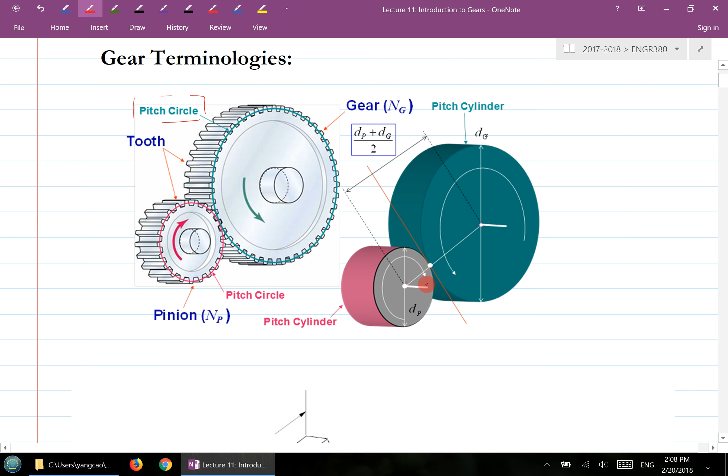Now coming back to this bigger one here. So you have a handout, and I think last lecture I gave you one of these. If you don't have one, this has a little more space to write. If you want one, you can come here and pick one up. Otherwise, there are also handouts in today's handout there.

So what are the important parameters here? There are 3 important circles - actually 4 or 5, but here it's 4. The circle at the outermost, here, is called the addendum circle.

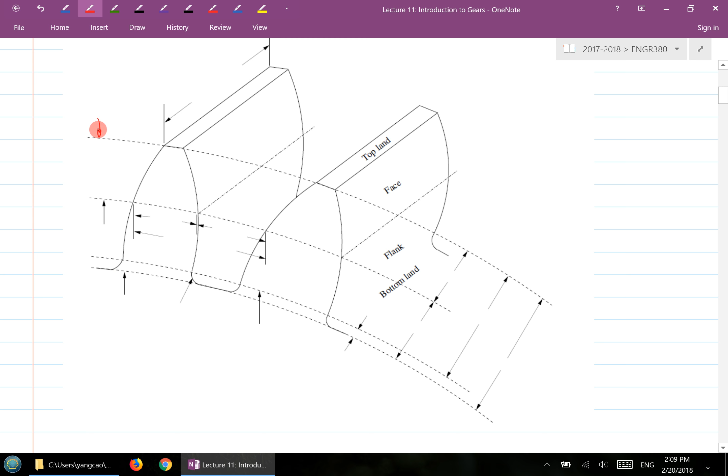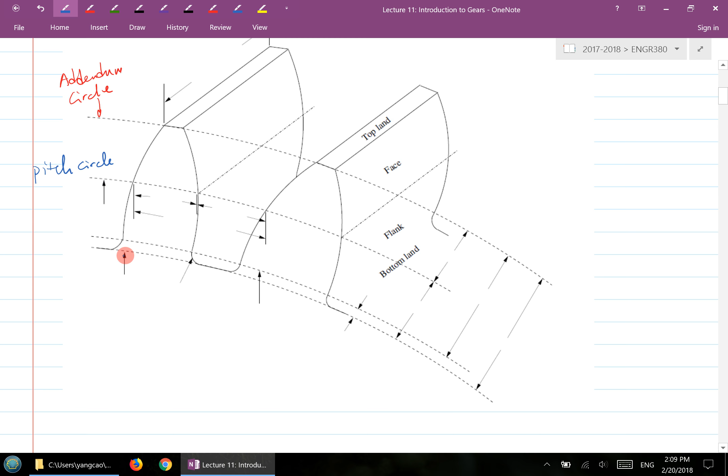So I want you to get used to all of this terminology here. The middle circle here is called the pitch circle. And then the circle at the bottom here is called the dedendum circle.

So these 3 circles are the most important circles. There's another circle called the base circle, which we will illustrate in the next diagram. And there's another circle here, called the clearance circle.

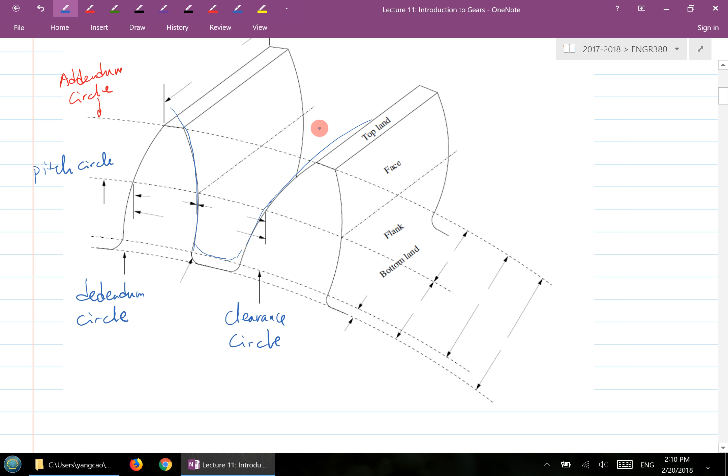Clearance circle is basically a circle that is tangent to the addendum circle of the mating gear. So let's say if you have another gear on the other end here, like this. This is the addendum circle for the other gear, and that addendum circle will be tangent to this clearance circle here, giving you clearance between the dedendum of this circle and the addendum of the other gear. So that's the clearance circle.

Along the pitch circle, from one end of the tooth to the other end of the tooth, this portion is called the tooth thickness. From one point on this tooth to the adjacent point on the adjacent tooth, this is called the width of space. If you add the tooth thickness and the width of space together, you get the distance from this end to here along the pitch circle. That gives you the so-called circular pitch.

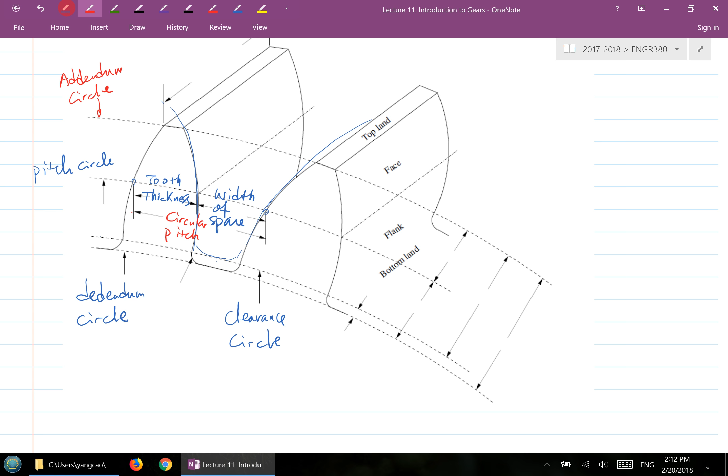And of course, there's another one here. If you measure the thickness of this gear, this is called face width. We typically use F to represent the face width. This is sometimes a little misleading, because sometimes we see F as a force, but in this section, F is the symbol used for face width. In some literature, they use a small b for face width.

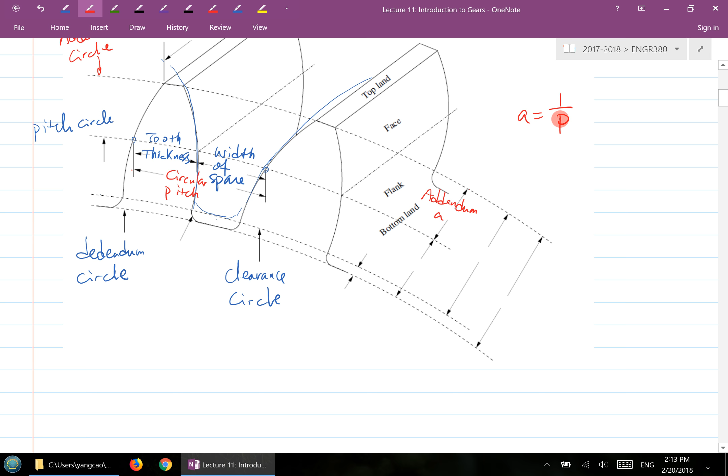Then over here, there are a number of parameters that are important. If you look at the shorter distance between the addendum circle and the pitch circle here, this is called the addendum. We use small a to represent this addendum. Typically for full-depth teeth, this a equals 1 over capital P, and I'll explain what capital P is.

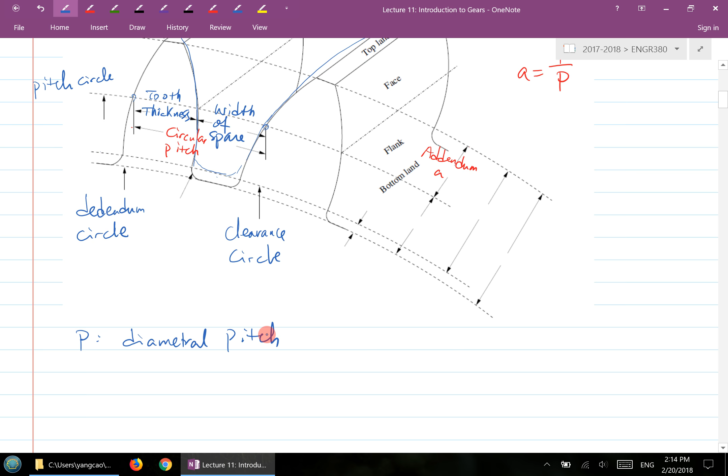Capital P here is called diametral pitch. So what is diametral pitch basically? Diametral pitch is defined as P equal to N divided by D, where N is the number of teeth and D is the diameter of the pitch circle. Sometimes we call it pitch diameter. You can see the unit for the diametral pitch is basically the number of teeth per inch.

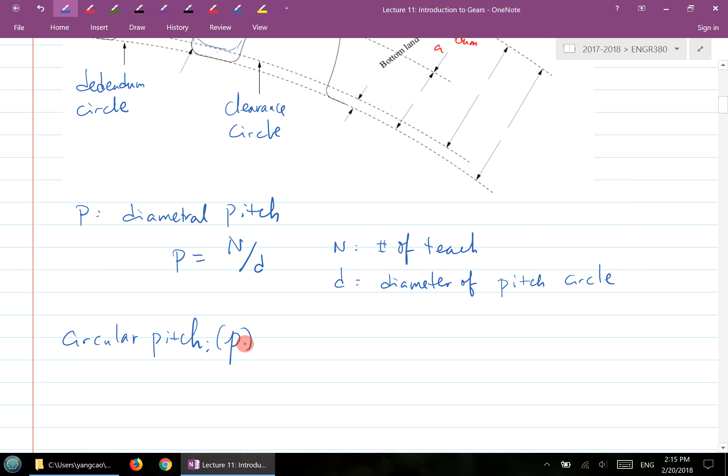Now coming back to diametral pitch, let's look at the concept of circular pitch again. For circular pitch, we use small p to represent it. The circular pitch is the distance from here to here. If you put it into mathematics, the circular pitch is pi d over n, where n is the number of teeth, and if you look at the perimeter of the circle divided by that, you get this circular pitch.

There's a relationship between diametral pitch and circular pitch. With one simple manipulation, you'll see capital P times small p equals pi. That's the connection between diametral pitch and circular pitch. Diametral pitch is a very important parameter - if you want a pair of gears to drive or mate with each other, the diametral pitch has to be identical for these two gears.

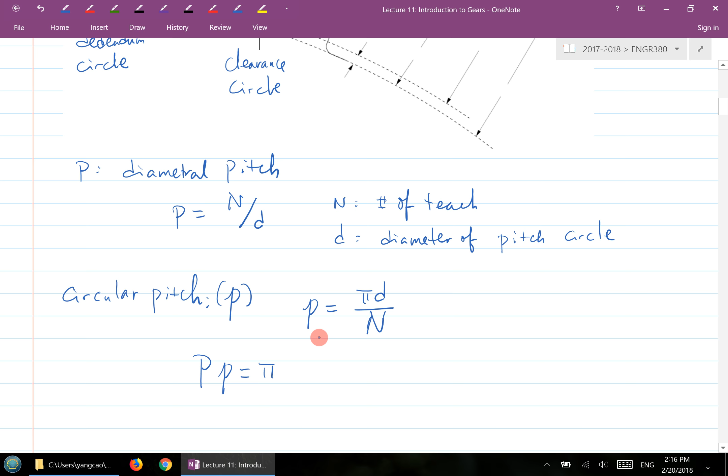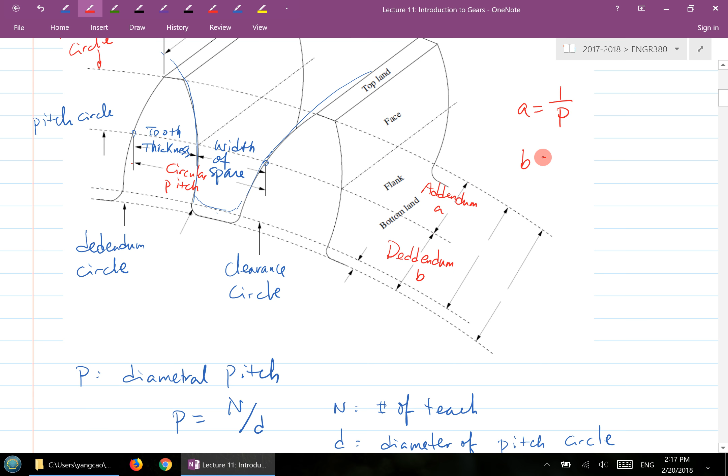Coming back to this addendum - the addendum is related to the diametral pitch, which is 1 over capital P. And if you look further, at the distance between the pitch circle and the dedendum circle, this is called the dedendum, and we use B for the dedendum. Typically for full-size teeth, it's 1.25 over capital P, the dedendum.

So if you look at further here, there's also a distance between the addendum circle and the clearance circle. So this part we call the working depth.

Okay, we call it working depth. And there's also a distance between the addendum circle and the dedendum circle here, so this is called the whole depth.

So let's call it H. And there's a distance between the clearance circle and the dedendum circle, you call that clearance. Let's call it C. The C value here is typically 0.25 over capital P, so that's your clearance value.

So as you can see, your whole depth, H, is equal to A plus B. And then the working depth, you can use this relationship: working depth is A plus B, minus C. Okay, so that's from this figure.

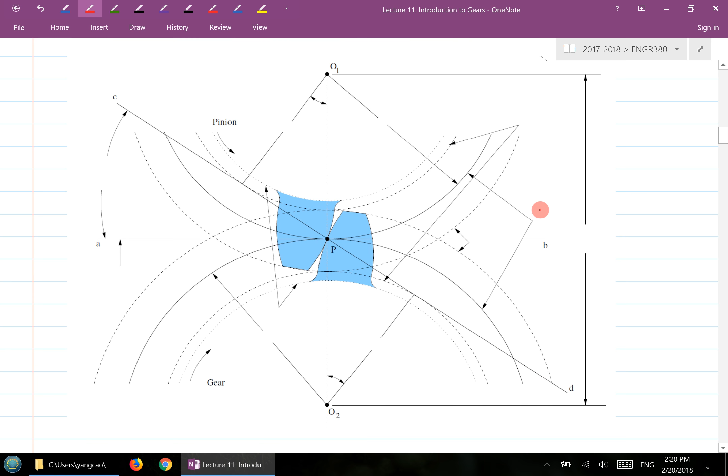There's one circle that's not on the previous slides, which is this one here, the most inner circle, and also this circle here. There are two circles that are not on the previous slide.

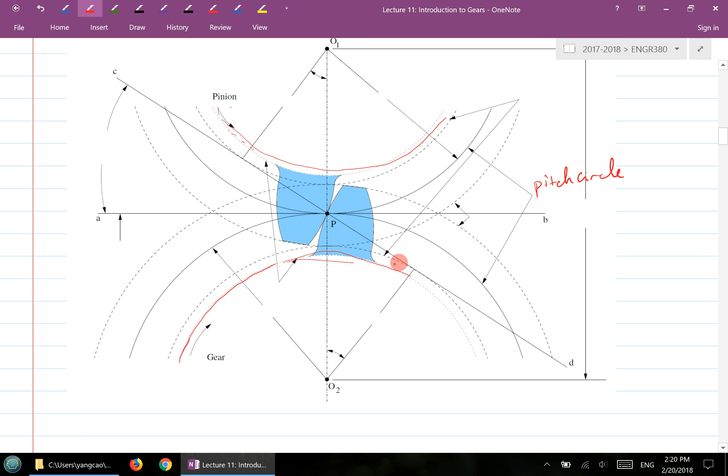Which arrow does that point to again? These two arrows, right? These two arrows point to those two circles. So this is the so-called base circle.

What is a base circle? We'll actually look at it a little bit shortly. The base circle is a circle based on which the profile of the gear starts to generate. You see the gear profile, which is a certain type of curve, and that curve is generated based on this base circle. That profile we call the involute profile, which I'll cover shortly. But that's basically what base circle means.

What's the difference between base circle and the dedendum? Oh sorry, my eyesight, this is not a base circle, what am I talking about here. This is dedendum circle, right? This one here, the bottom, is dedendum circle. Base circle is this one.

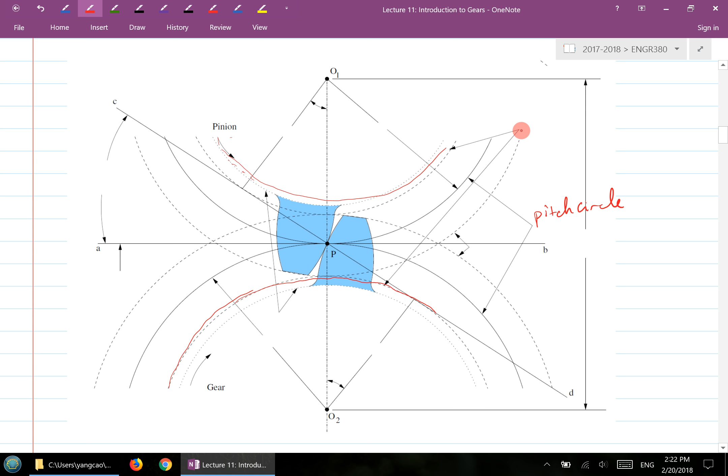Base circle is this circle here, the one that's above the dedendum circle. Which arrow is that? This arrow here, right? Yeah, so this is the base circle. Otherwise there wouldn't be any difference, right? Yeah, the one I just wrote down here is dedendum circle.

So this is the base circle here. There's a portion of gear tooth profile generated from this point, which is the involute, and I'll teach that shortly. There's a little portion of the tooth profile between the base circle and the dedendum circle, and that portion is actually a straight line. Then you chamfer that and fillet it, you see a little bit to fill it here. So this base circle is not on the previous one.

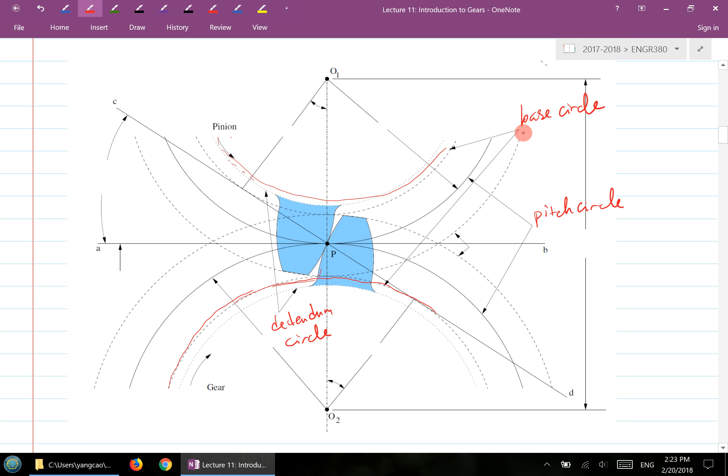Now there's a difference, you might confuse the base circle with the clearance circle though. Remember, the clearance circle is the circle that is tangent to the addendum of the mating gear, right? So if you look at the clearance circle, this is the clearance circle.

If you have a gear or pinion on the other end, then there is an addendum circle here, so that clearance circle is tangent to the addendum circle. And the base circle is a circle upon which the gear profile is generated. Good? Yeah.

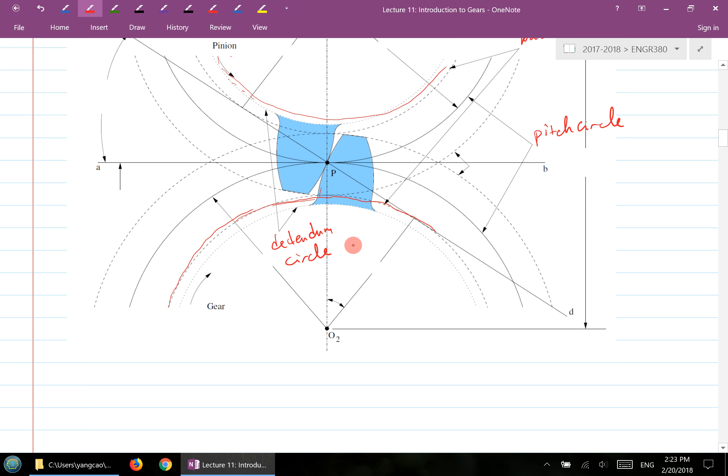So of course you have an addendum, which is this portion here, so that's your addendum circle. Okay, so that covers all of this here, right? Yes. So it's just coincidence that our base circle is at the same point, the same place that our dedendum circle would be?

This one, yeah, I don't think it's a coincidence. Yes, it's sort of tangent to the addendum circle, right? Addendum circle. But yes, it doesn't have to be.

So base circle, I'll show you a little bit of animation later just to show you some of that shortly, okay. And then there is a horizontal line here that is basically tangent to both of the two pitch circles. We call that the AB line here, so this is called the common tangent line.

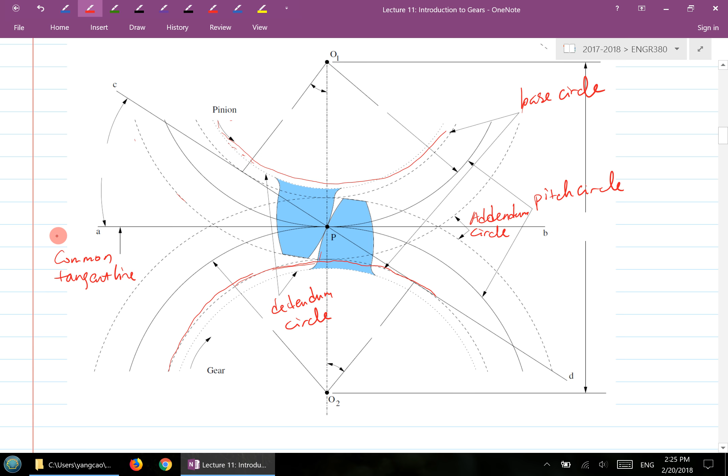Okay, common tangent line. Above the common tangent line here, there is another angle between the common tangent line and the line CD. This is CD at here. So the CD at here, if you look at it, right?

The CD line, it's a line that is tangent to which two circles? To this circle and this circle, which we just said are base circles, right? So the CD line is tangent to both of the base circles, and this CD line is called the line of action.

Okay, so line of action. Basically, this CD line is perpendicular. If you look at this CD line, it's perpendicular to both of these tooth profiles that are in contact at here, because you're using one tooth to push the other, right? So the action-reaction force, because of this pushing, is along this line of action at here.

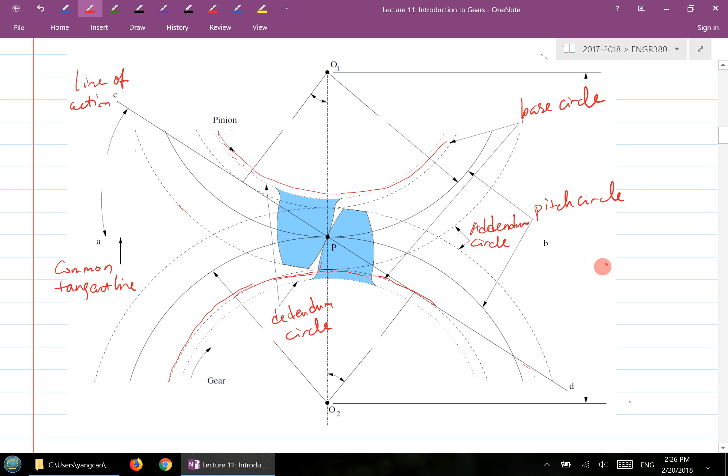That's what the line of action is. And the line of action intersects with O1, O2, and this point at here is called the pitch point. So this capital P here is called the pitch point. So as I'm going to cover very shortly, for the gear, there's only one line of action, which is this one. And that type of structure guarantees that you're going to have a constant angular velocity ratio, because of this kind of tooth profile and structure of the curve.

The angle between the line of action and a common line here, we call that phi. So this is called the pressure angle. Pressure angle essentially is how the force is being pressed from one tooth to the other tooth. So the pressure angle is a very important angle. In gearing, normally 20-25 degrees. We use 20 degrees quite a lot.

There are also sometimes 14.5 degrees. You can literally use any angle for the pressure angle, but these are the three pressure angles that the industry has been using for the gears that you buy, essentially. You specify pressure angle by specifying one of these values.

So if you visualize this, you have two drums, and then the line of action is like a string that is tangent to the two drums or cylinders at here. So that tangent is very tightly tangent here. So these two basically will be moving, constrained by this line from here to here. This line, they're not going to relax. They'll always be like a very tightly stretched string between these two cylinders. So that's pressure angle.

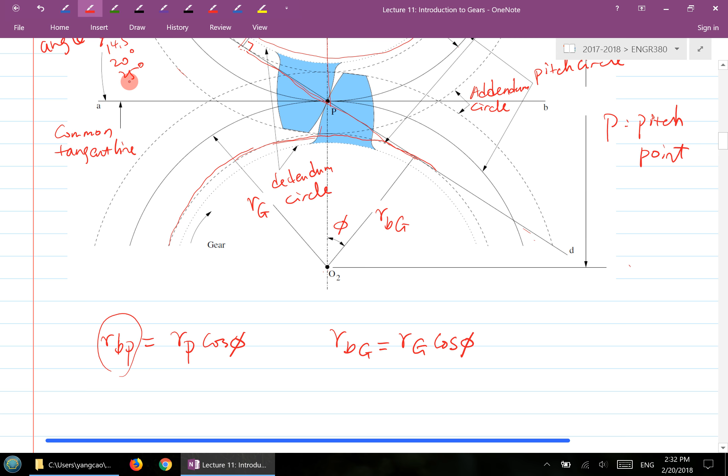Later I'll show you the picture of what's the effect of that in terms of the generation of the involute profile. So those are the terminologies essentially that you probably will come across quite often in the assignments or in the near future for gear designs.

Another thing we want to touch upon is the gear tooth profile. Before we talk about the gear tooth profile, let's talk a little bit about the very general case. Suppose you use one object pushing another object, and both of the objects are fixed at a certain pivotal point.

Now, if your objective is to generate a constant angular velocity ratio, okay, if the objective is to maintain a constant angular velocity ratio, that's very common, right? You probably learned this in kinematics and machine mechanisms, the 381 course.

There's a very interesting mechanical component called the cam. The surface of the cam maintains a kind of surface which gives you the objective of maintaining a constant angular velocity ratio. If you can achieve this objective using this sort of surface, this gives you the so-called conjugate action.

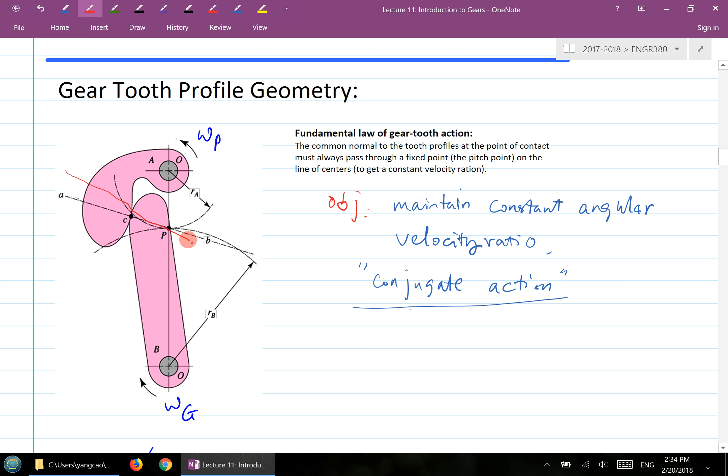However, the difference is, if you move it to the next location, you might have a different line of action. You might have a line of action that's this, but the line of action will still go through this pitch point P. So basically this way you will be able to maintain this constant angular velocity ratio.

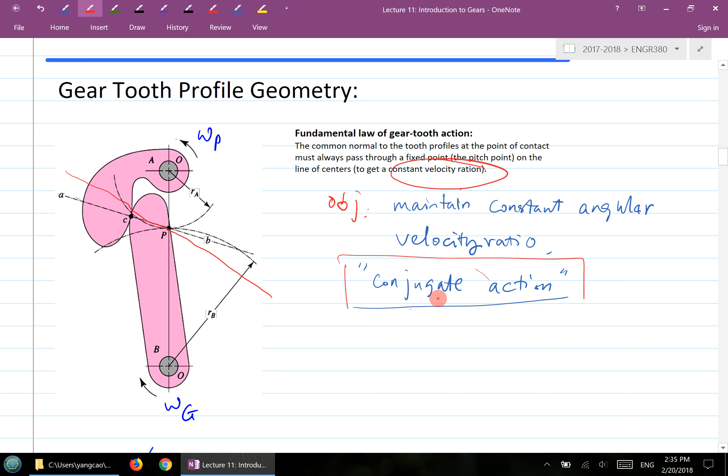That type of profile is something that when you design a gear, that's basically what you want. You want to maintain a constant angular velocity ratio, so you want to have a conjugate action. So what type of surface profile will give you this objective? This is basically the profile for the gear. The profile of the gear is the so-called involute profile.

So what is the involute then, the involute profile for gear? Imagine this: you have a cylinder, and you have a string wrapped around this cylinder very tightly. Now what you start to do is unwrap this string from the cylinder. You grab one end of the string, so this is one end of the string here.

When you unwrap this string from the cylinder, make sure the string is stretched tightly every moment, and you basically unwrap that string from the cylinder. Now if you trace out the trajectory of the string, which is this one here, it gives you this so-called involute curve. The gear profile is basically part of the involute curve from here to here.

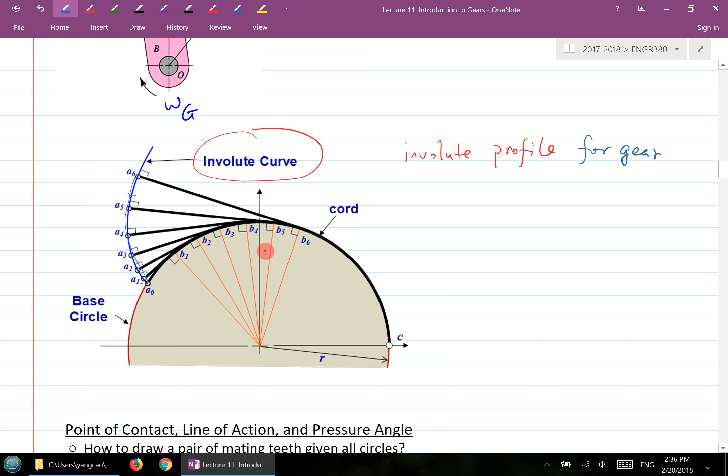And this circle is the circle I just mentioned, that's the base circle. So the gear profile, this portion here, is this involute profile, and it's generated in a manner like this. That's what the involute profile is.

You can mathematically model this involute profile using a parametric equation. You can take a look at my lecture notes, which provide a more detailed derivation of the mathematical expression for the involute profile.

Suppose I'm going to generate the parametric equation for the involute profile starting from this A location. The red line shows the trajectory, like a piece of wire or string unwrapping or unwinding from this cylinder here.

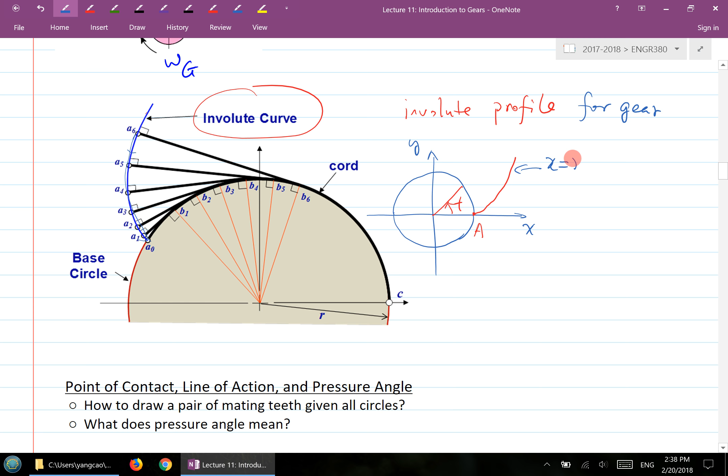If you look at the lecture notes and derive the parametric equation, you'll see that for this involute curve, x equals r times cosine t plus rt sine t, and y equals r times sine t minus rt cosine t. So you get a parametric equation describing this involute profile.

In this week's tutorial, I sent you an email with an exercise to use SolidWorks to generate the gear. By going through the exercise, you get familiar with all the different terminologies, and one of the approaches is to generate this gear profile using a parametric equation.

You can generate the parametric equation not necessarily starting at the A location - you can generate it at any other location by changing the t value. For example, if you want to start at the B location, all you need to do is change t to t plus 90 degrees, and the curve will start from B instead of A.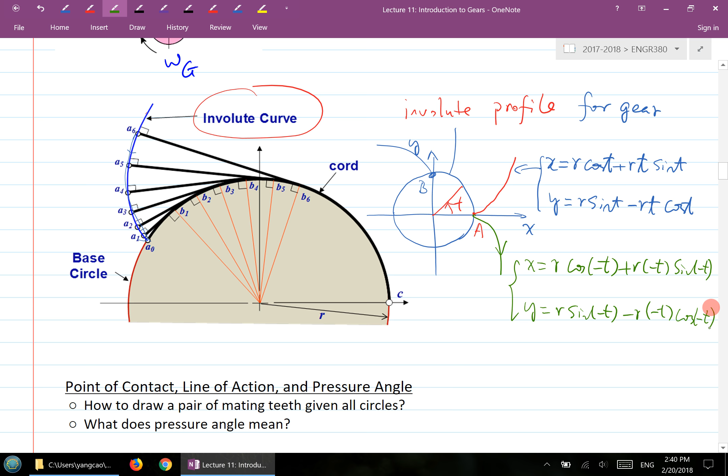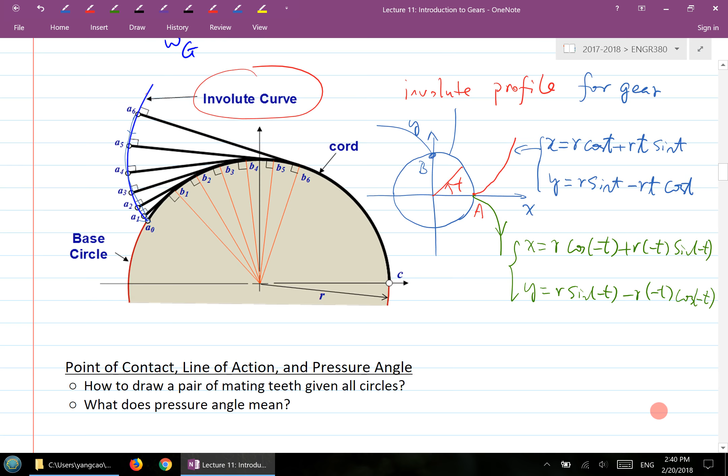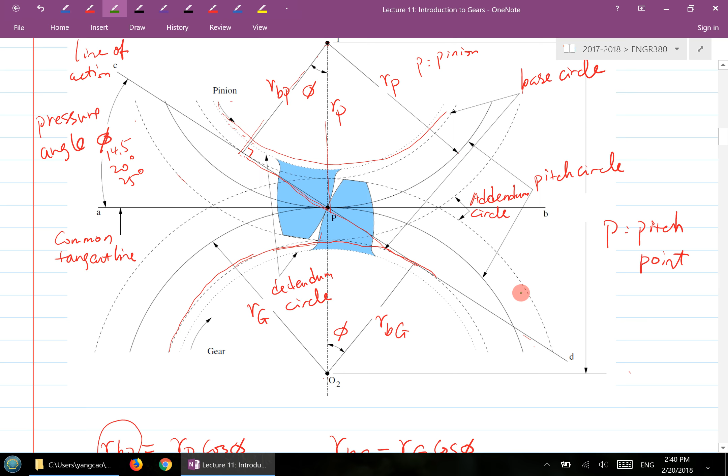So that's the involute profile for the gear. Now, in the terminology here we have a concept called pressure angle and also line of action. Let me quickly touch upon the pressure angle again with a small animation.

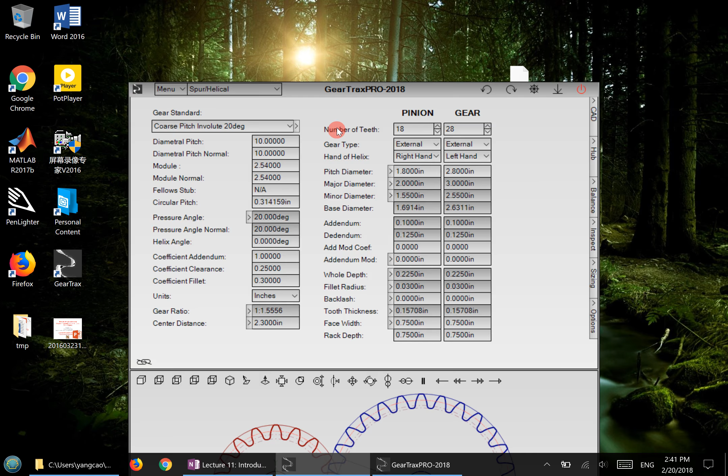This is a very useful application, but unfortunately it's not free, so I use it for illustration. This one demonstrates the meshing of two gears. You can literally see the action-reaction here, and see this line from the origin of the circle to this circle here.

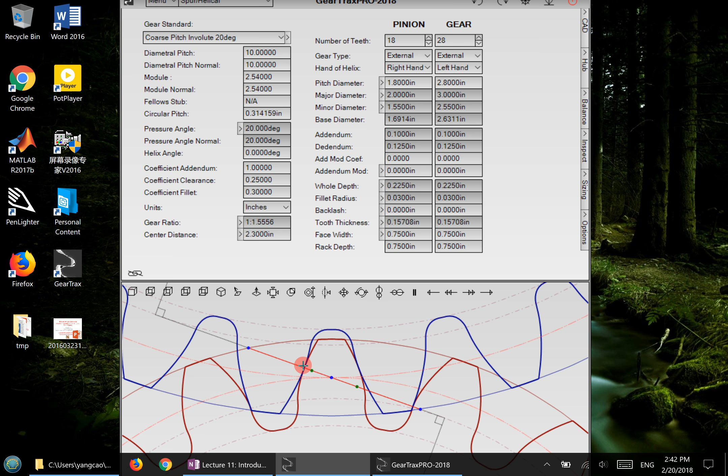As we just learned, what do you think this circle is? That's right, this is the base circle. You connect these two tangent points for the two base circles, and that's the line of action. Now watch carefully in terms of the contact points between the pinion teeth and the gear teeth as you move the gear.

Just watch this contact point here. What you see is the contact points between the two teeth are always on a line - they're always on that line of action.

That's basically what we call the pressure angle - the force is always in that direction. That's the unique thing about the involute profile. Remember the conjugate action I mentioned, where the line of action doesn't necessarily have to be unique all the time - but for gears' involute profile, the line of action is always unique, always in that direction with the given pressure angle.

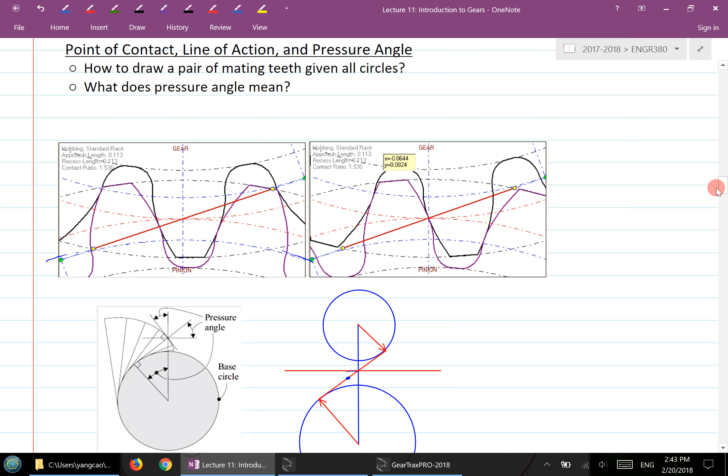If you look at the contact point between other pairs of gears, you'll see basically the same phenomena - they're all on the same line of action. So that's pressure angle.

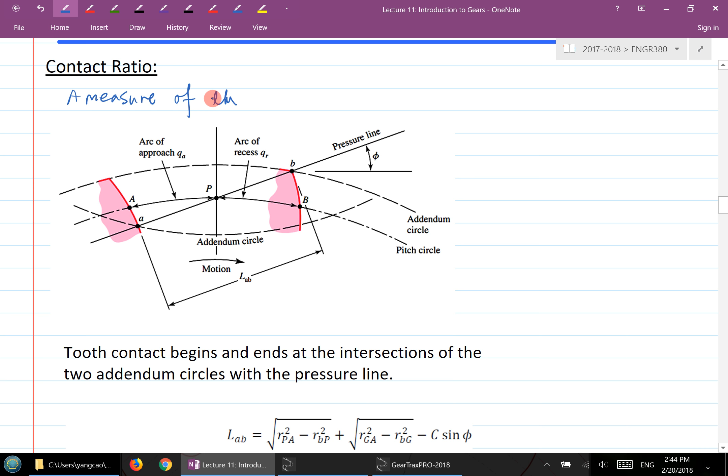One more concept: contact ratio. Let me write it down here - you have your handout, you can write something there. Contact ratio is a measure of the average number of pairs of teeth that are in contact.

When you use a gear, a pinion drives a gear, transmitting power from one end to the other. The force is transmitted when the pinion's teeth press against the gear's teeth. You don't want just one pair of teeth in contact all the time—you want load sharing, meaning more than one pair of gear teeth in contact with each other.

That's what the contact ratio wants to tell us—it's the measure of the average number of pairs of teeth that are in contact. We typically use MC to represent this concept.

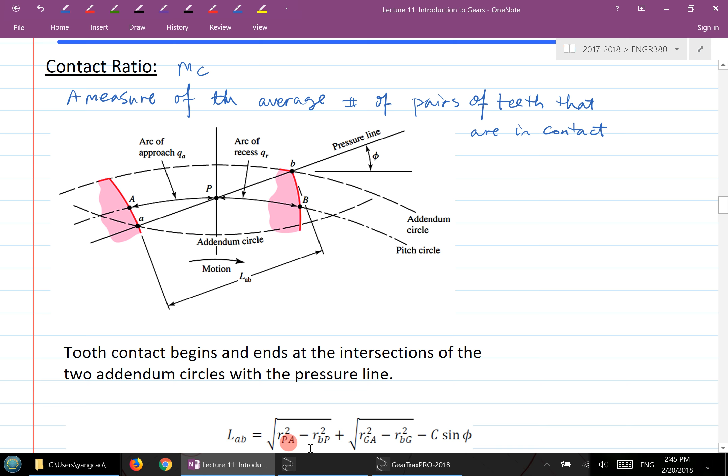Before we label the terminologies, I want you to observe this statement: the tooth contact begins and ends at the intersections of the two addendum circles with the pressure line. So what does that mean? It's basically the extreme points between the contacts of the gear teeth.

Let's look at this animation. Let's find a good starting point—right here, look at this point. Now if I move it a little bit to this side, you see this blue dotted line appear.

Oh, that's so annoying.

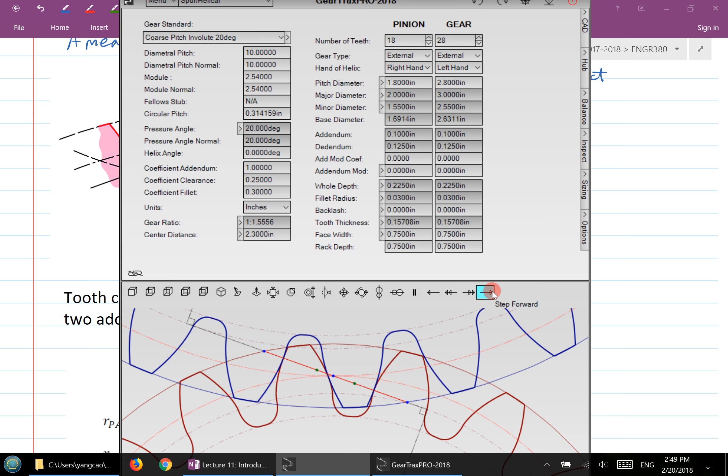This is the distance I showed from A to B—we call that the line of action, and this distance is called the length of action, from A to B.

Within the circle, there's an arc called arc of approach QA and arc of recess QR. If you add QA and QR together, in total we call that QT, which is the arc of action. So this is the length of action, and this total arc length is called the arc of action.

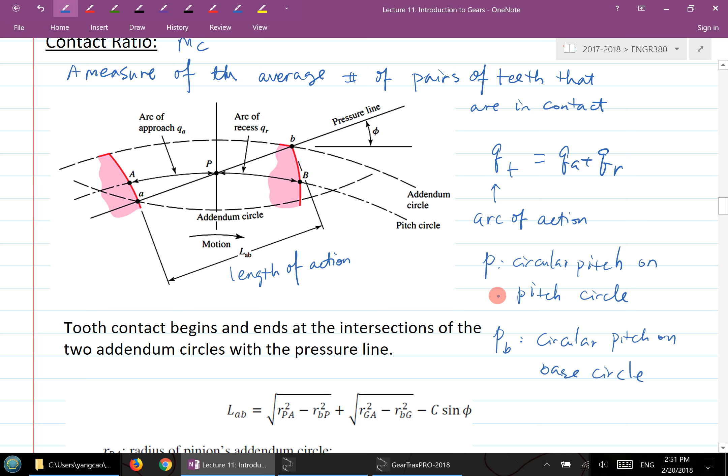If we use small p to denote the circular pitch on the pitch circle, and small pb as the circular pitch on the base circle—along this circle you have the circular pitch on the pitch circle, and on the base circle you have a similar circular pitch but with a different value. These two are connected by the formula: small pb equals small p times cosine of the pressure angle.

Now, for the value of the length of action, here's a formula for calculating it. Each symbol is denoted below: RPA is the radius of the pinion's addendum circle, RBP is the base circle radius for the pinion, and C is the center-to-center distance. The derivation of this formula is given in my lecture notes—you can take a look at that for the details.

Now the contact ratio MC can be calculated using these two formulas: either the ratio between LAB and PB, or the arc of action divided by the circular pitch. Either of these two will give you the same value, which is the contact ratio.

In terms of the proof why this is equal to this, I also have the proof in my lecture notes. If you're interested, you can take a look at that. It's purely geometry, basically.

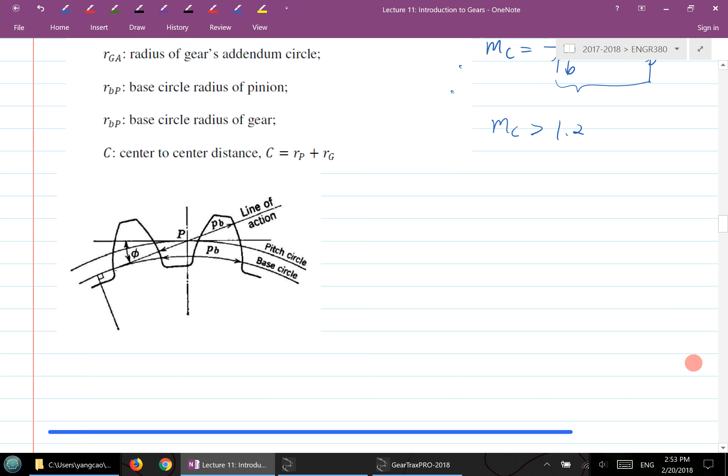Interference. This is another concept related to the gear. So what's interference first of all? Before we talk about interference, I think we should probably just jog your mind in terms of the gear profile here. Gear profile.

So this is typically how you draw a gear. You can start with the base circle. So let's see, this is the base circle here. Starting from the base circle, you will be able to generate that involute profile using a parametric equation.

You could also have, of course, the important one, which is the pitch circle, and then of course finally the outer side circle, which is the addendum circle. So those circles, as long as you have the number of teeth and diametral pitch, will actually determine the important parameters. So if you have a diametral pitch and a number of teeth, you can determine the pitch circle radius.

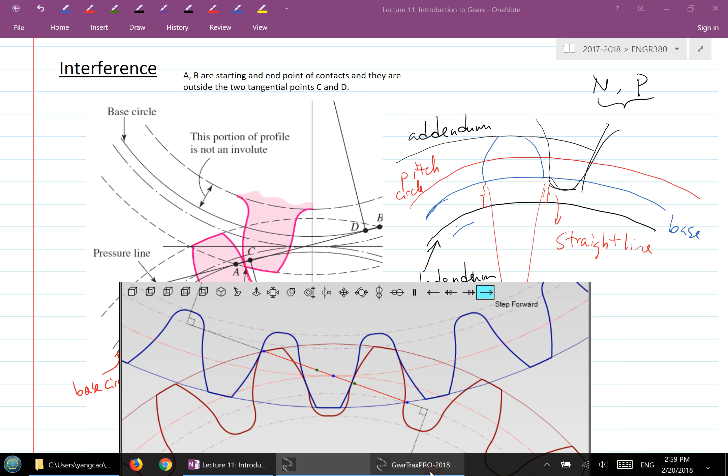Interference happens when you have a certain combination of teeth numbers and also pressure angles. So let's say I'm going to lower my pinion number.

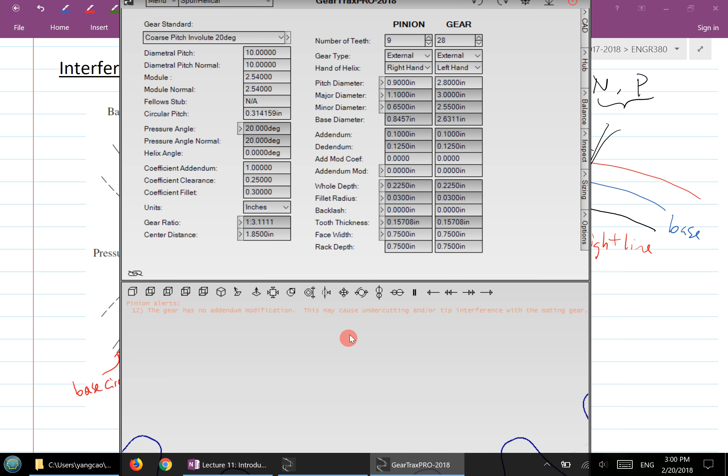Let's lower my pinion number to maybe 9. So now you see this red one is the pinion. Right now the number of teeth for the pinion is 9.

So what you see at here from this animation, there's a certain portion of material being carved out, being basically removed. Now if you don't remove this portion, just imagine you have a straight line goes from this point right to this origin at the bottom here. There's a straight line portion from here to the end.

So then what happens? If I move around, you'll see some of this. If I look at this contact point here, if you draw a line goes down to here, you can clearly see that this portion of the involute will dig into that straight line portion, right? That's basically interference.

And what this drawing does is a manufacturing process called undercut, because with this number of teeth, 9, there will be interference. But if your customer insists on using 9, then you have to carve out, remove a certain portion of the material from here. That's called undercut, to prevent this interference from happening.

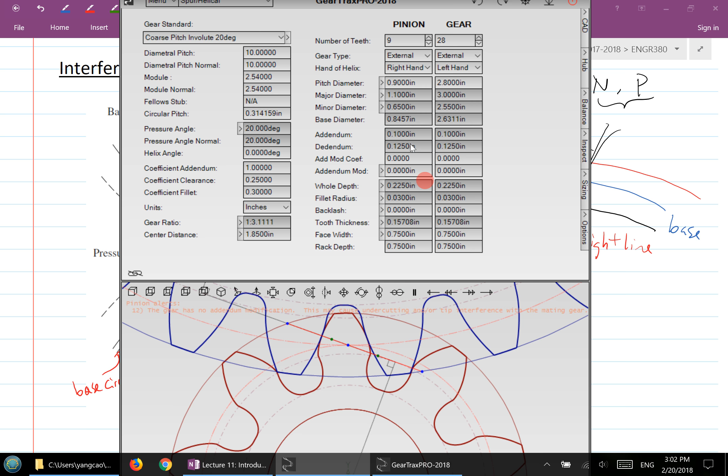Watch what happens if I increase this number of teeth on the pinion, and also watch these blue dots that are here. If I increase this, you see the blue dots? Where did they go? Now they move into these two tangent points.

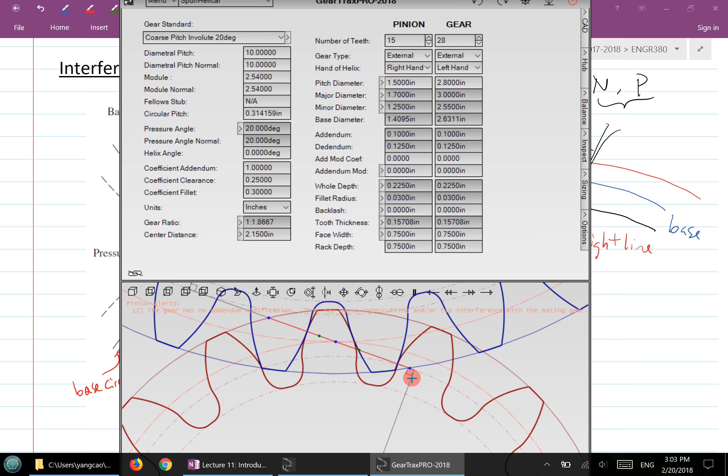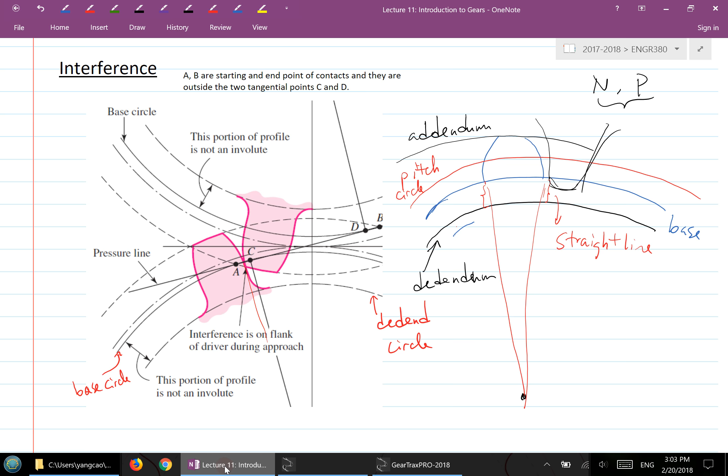So mathematically, you can actually use this constraint, which is one of the formulas I'll give you, to derive what would be the minimum number of teeth to avoid interference. That's a constraint you can use to avoid interference here.

We still have some time, so this is basically a couple of formulas I want to write down at here. So what will be the number of teeth to prevent interference?

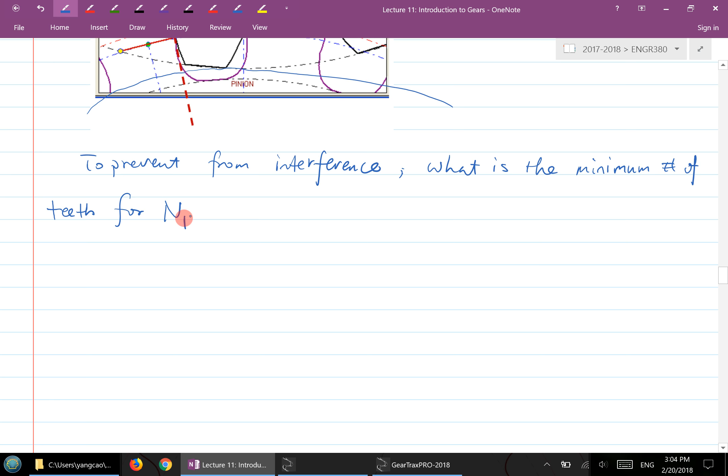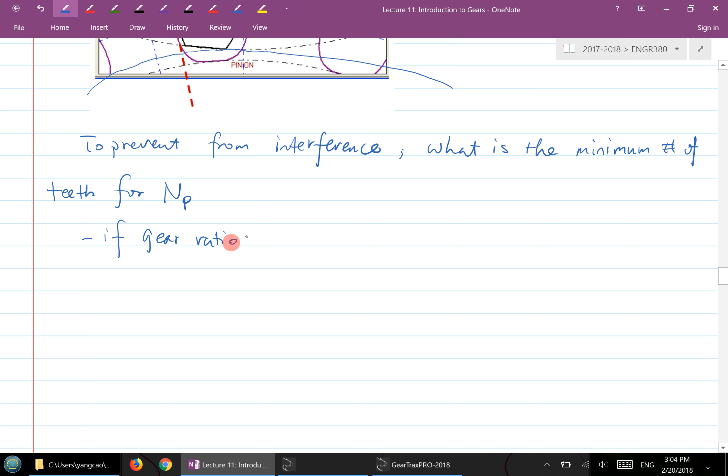To prevent interference, what is the minimum number of teeth for the pinion, NP? If gear ratio we use M for gear ratio, and NG over NP is a gear ratio, if that number is greater than 1, then the smallest number of teeth on pinion is the following formula.

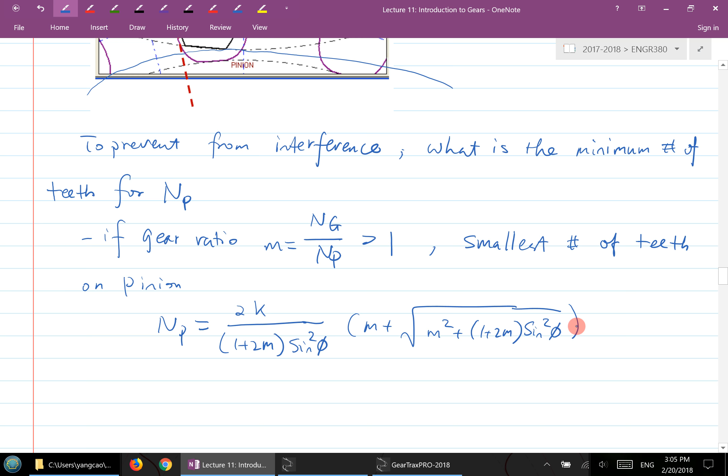So you use this formula to calculate the smallest number of pinion teeth if the gear ratio is more than 1, in order to avoid interference.

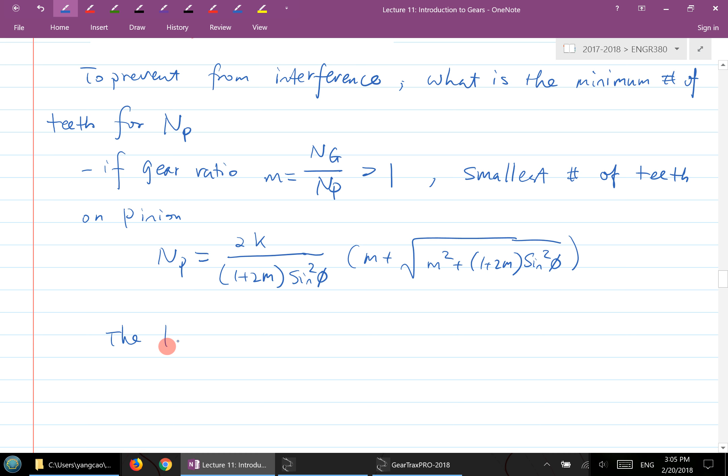Not only is there a requirement on the minimum number of pinion teeth, there's also a requirement on the largest number of teeth for the gear.

And this formula is given for NG, which is NP squared sine phi squared minus 4k squared, and 4k minus 2NP sine phi squared. So these two formulas come in a pair, and you use them as a comparison. I'll show you a figure, a table based on this calculation here.

So let's see how we calculate this. There's one parameter in the two formulas, the key parameter, k. It will equal 1 for a full tooth, and typically it's a full tooth. But for the gear, there's another type of tooth called a stub tooth, which is a little short in terms of height. If that's the case, then you use 0.8 for stub tooth.

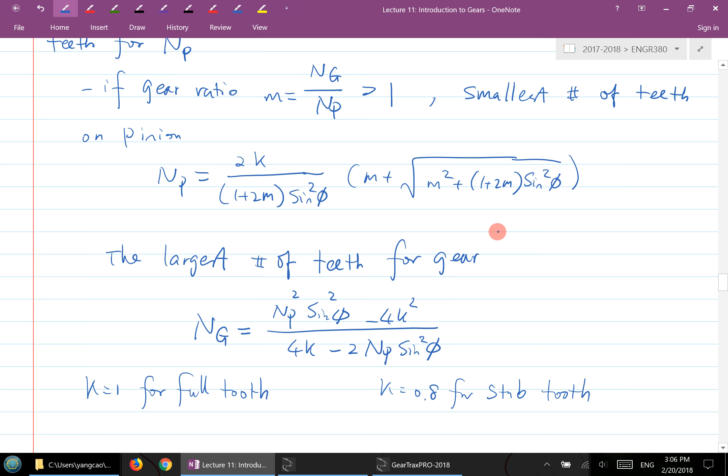And M is the gear ratio, phi is the pressure angle. You plug in all the numbers and you'll be able to get NP and NG. So let's give you an example here.

So let's say we take pressure angle of 20 degrees as a calculation. If we plug in phi equal to 20 degrees, and if we choose a number of teeth for the pinion as 13, then we plug into the second formula here, we're going to get NG equal to 16. So basically, if your pinion number is 13, then in order to avoid interference, the maximum number of teeth on the gear is 16.

K is not 1 when you have a cutoff? K is 1 when you have a full size tooth, and it's 0.8 when you have a so-called stub tooth, which is a shorter type of tooth.

So if you try a few numbers, let's say pinion teeth is 16, then you get NG is 101, so it increases significantly. Now when your pinion teeth is 18, then your maximum NG becomes infinite basically. What does that mean? It means if you have 18 on the pinion, then you can choose any number of gear teeth. Of course, minimum is 18, since you want to maintain that ratio to be greater than 1.

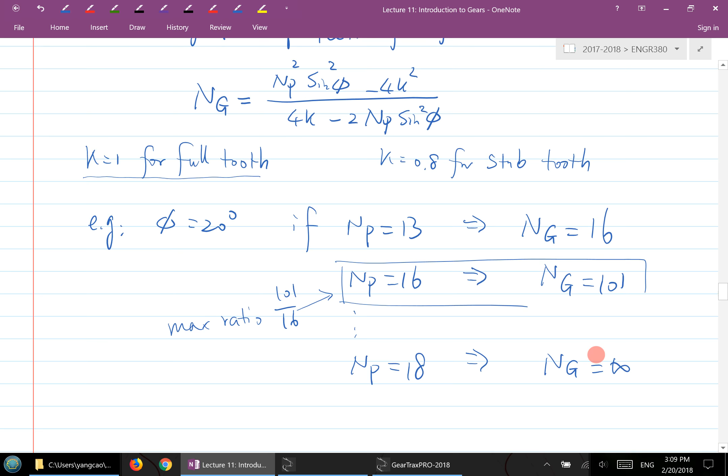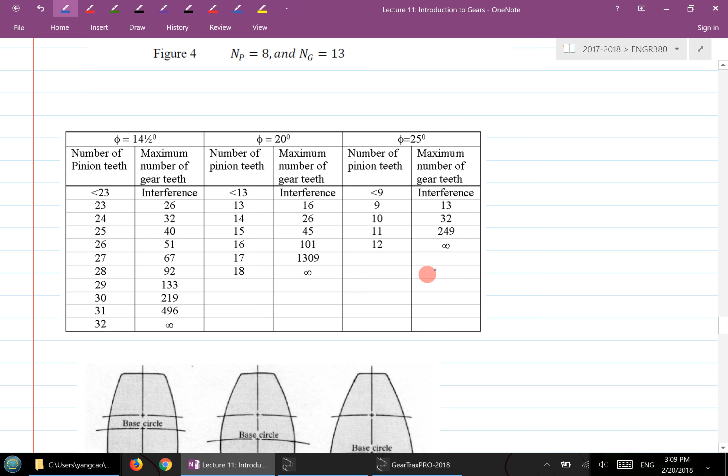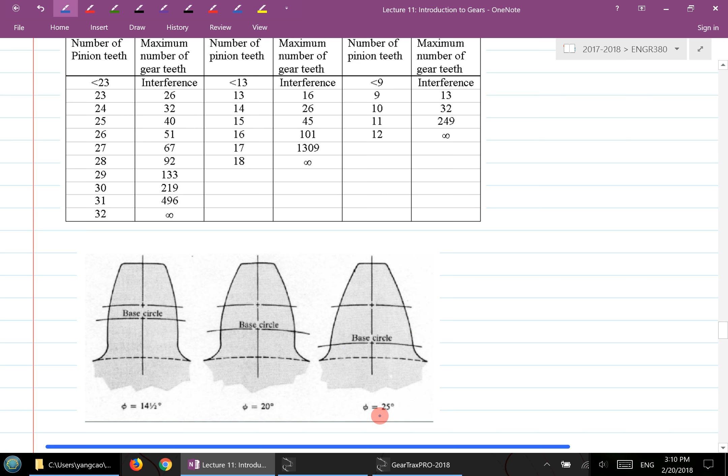The following figure shows you the effect of pressure angle. As pressure angle goes up, as one of the formulas I showed you indicates, the base circle radius becomes smaller. So which basically means you have more involute profile here when you have a higher pressure angle. More involute profile means less chance of interference. That's the concept of interference.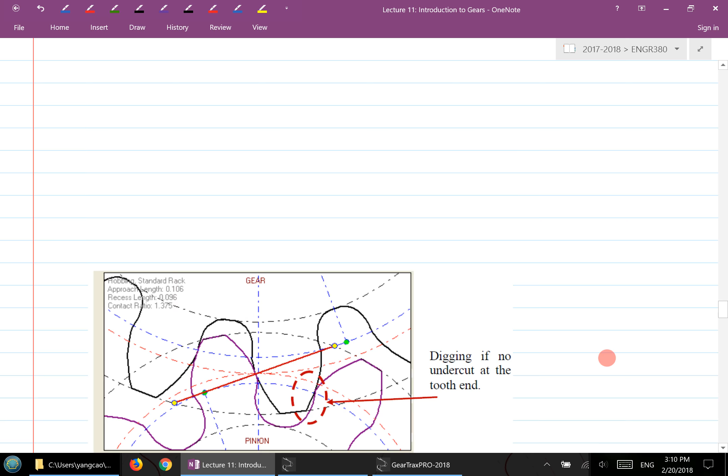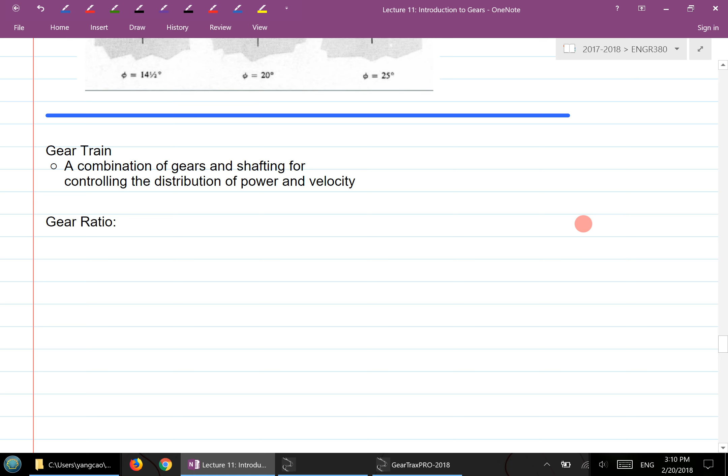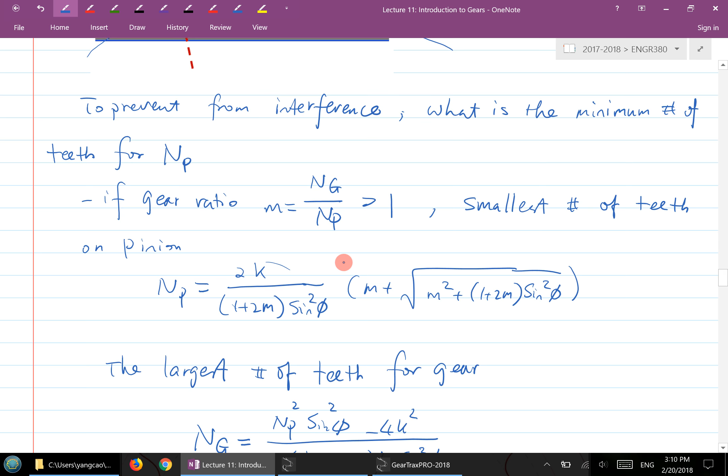In the future projects, the first step is actually to calculate the minimum number of teeth on the pinion in order to have no interference. Based on the given specifications, like gear ratio given as 3.5 if I remember correctly, then calculate the minimum number of pinion teeth to avoid interference using this formula. Then from there, you can come up with different combinations of pinion and gear teeth to satisfy the gear ratio and also satisfy other requirements.

One more concept: gear ratio, and also something to do with gear trains. You don't just use one pair of gears — you often have a number of gears connected together to form a so-called gear train. But first, let's understand the concept of gear ratio again.

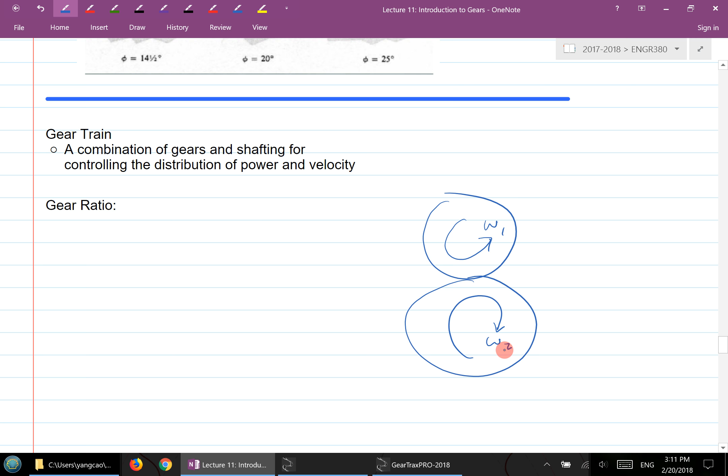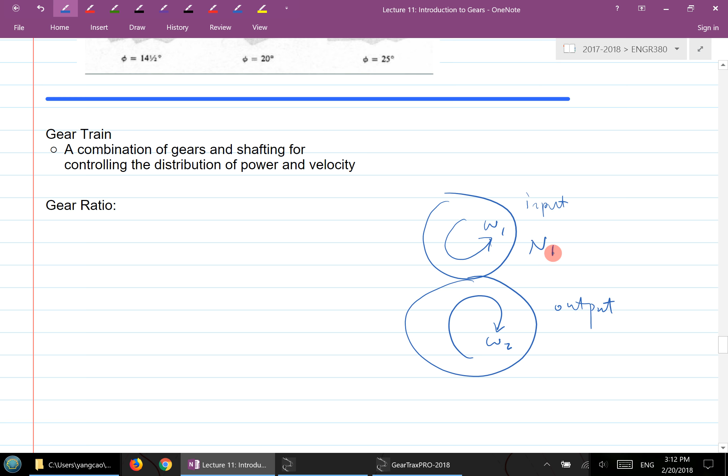So if you have two gears meshed with each other, let's say this is the input and this is the output. Omega 1 is the input angular velocity, omega 2 is the output angular velocity. You may have N1, N2 for the number of teeth for this gear and that gear, and we use R1 and R2 for the two radii here. So one way of defining the gear ratio is any one of these combinations.

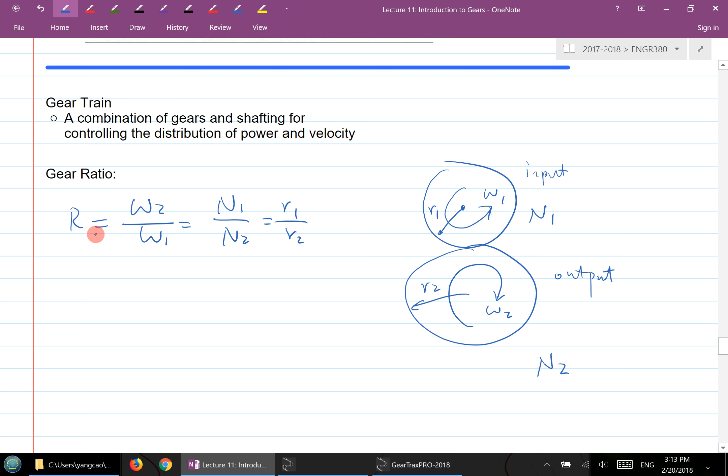So any one of these expressions — you use the output angular velocity divided by the input angular velocity, and that equals the number of teeth of the input divided by the number of teeth of the output, or R1 over R2. They're all the same — this is basically your gear ratio. Yes, you previously used M for gear ratio — it doesn't really matter, but that's a very good observation.

Just to emphasize it here, in the automotive industry, the gear ratio...

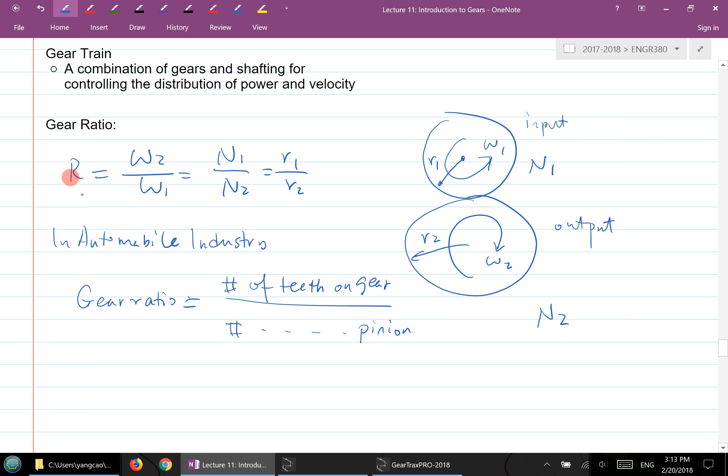That's the one I used in the previous example. They can use just number of teeth on gear divided by number of teeth on pinion. It's actually a reverse number from this expression. So if you have a gear tooth 30, then pinion tooth 15, you get a gear ratio of 2. But if you flip into this one here, you actually get 1 over 2. So really doesn't matter, just bear in mind of the context for any questions or any things that you do.

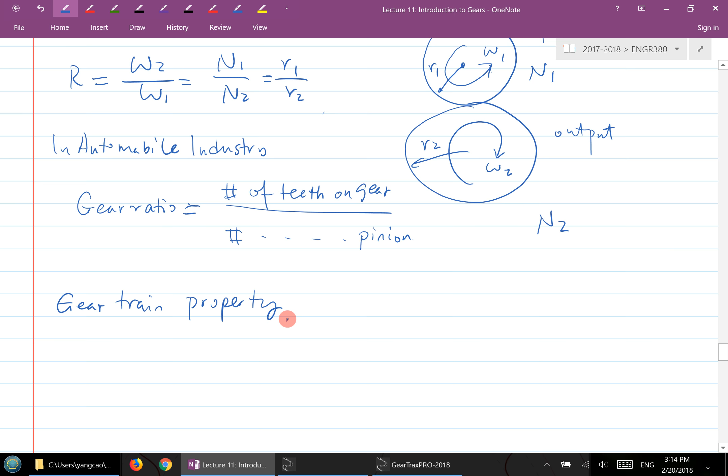Now one more thing, let's talk about the gear train property. So if it's not just two gears connected to each other, if there's actually a number of gears connected to each other, here's one example. Let's say I have a small gear here and a relatively bigger one here, then a small gear over here, but there's a bigger gear like this, I'll explain a little bit, and finally another gear here. So let's suppose we have a gear train like this. I'm going to call this number 2, this is number 3, this is number 4, this is number 5, and this is number 6, for example.

Let's visualize how the motion is being generated. So number 2, let's say, moves with an n2 revolutions per minute or velocity like this. So number 2 pushes number 3, so apparently number 3 will go this way now, right? Let's say number 2 has n2 number of teeth, and this has n3 number of teeth, and this 4 has n4 number of teeth, this one has n5 number of teeth, and this one has n6 number of teeth.

So if 3 goes this way, the 4 and the 5 here, basically you can visualize it as 2 gears attached to the same shaft. So 4 here is being driven by 3, which goes this way, and then 5 is attached to the same shaft as number 4, so this 5 will go this way, and the 6, of course, finally will go this way. So that's the motion sequencing, because of the gear train here.

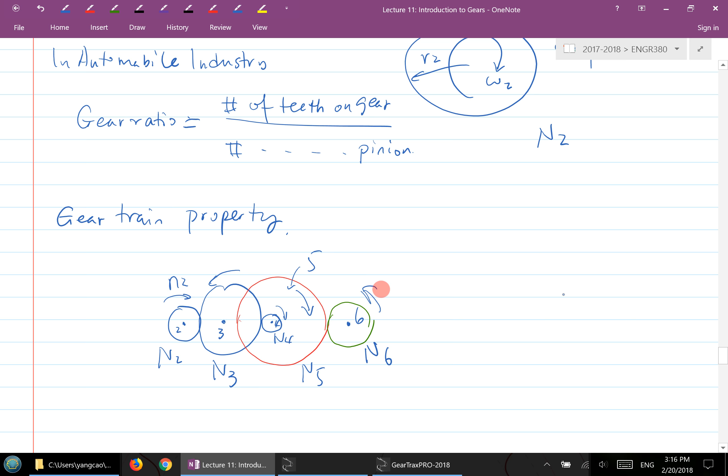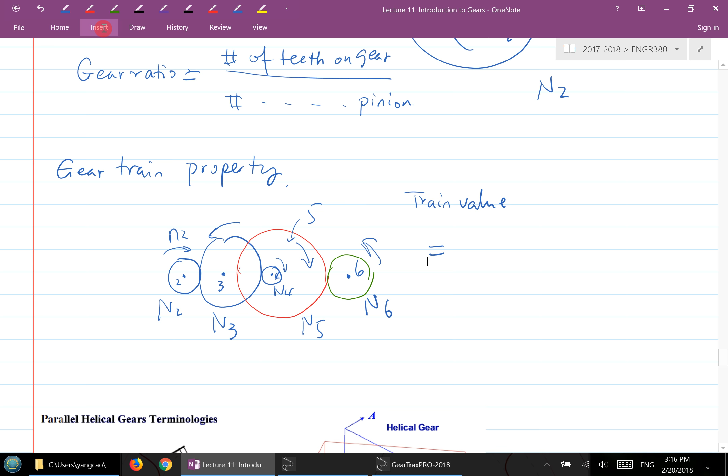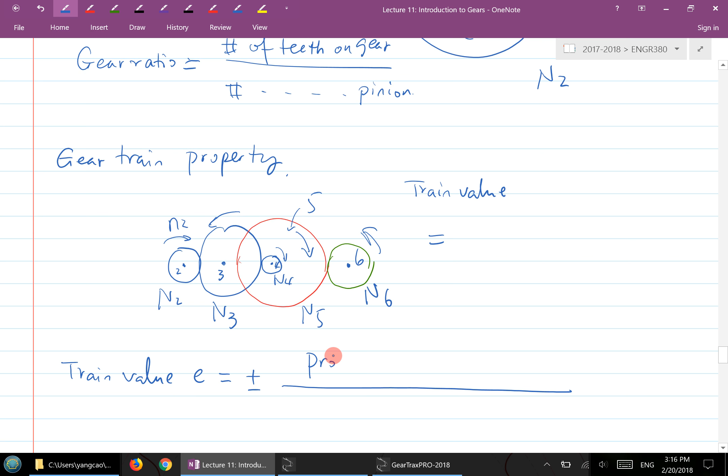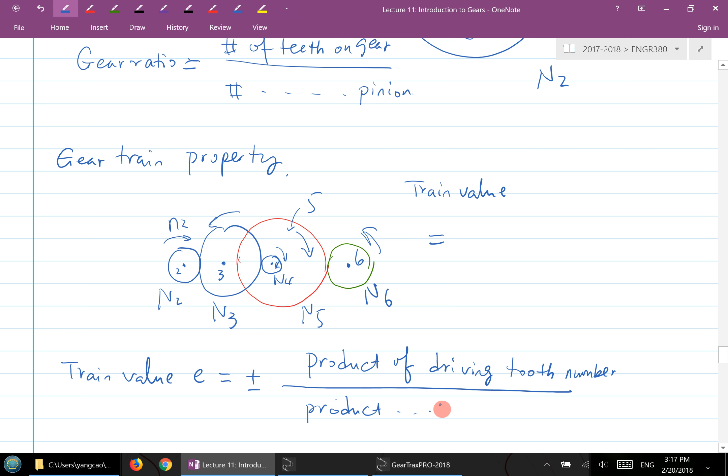Then for this type of problem, there's a very important concept called the train value. The train value will give us the ratio between the angular velocities. How the train value is defined: so I write down the general formula here. Train value E is equal to positive or negative a ratio. On the numerator, it's the product of driving tooth numbers. The bottom here is the product of the driven tooth numbers. So that's the formula for calculating train value E.

So let's take a look at this example. How's that related to this example? For this particular example, E equals numerator is the product of the driving tooth number. Let's look at this sequence of gears, which one is the driving? Number 2 is the driving, right? Number 2 is the driving here, so that's N2. And number 3 is being driven, however number 3 is also driving, so number 3 is actually called an idle gear. And then number 4 is a driven one, but number 5 is a driving gear, so driving 6. So that's the numerator. And denominator is a driven one, so there's N3 still driven, and then N4 and N6. So that's the ratio, right?

What about the positive and negative here? The positive and negative will indicate the direction change. So if you look at the current one here, there's apparently a direction change, so you need a negative sign in the front. So that's the train value. The usage of train value basically is: if I know the input angular velocity omega 2, then all we need to do is multiply by the E value, then you get the output angular velocity omega 6.